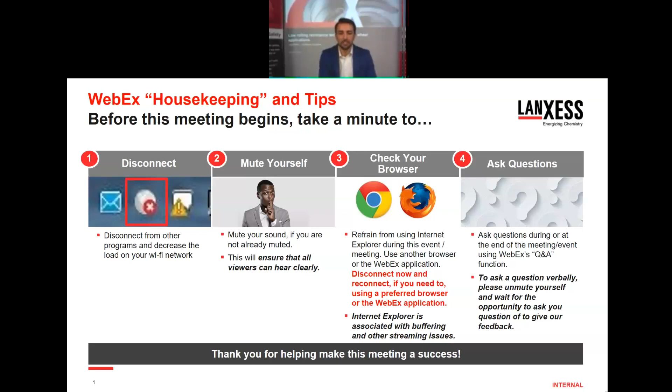I'd like to take the first 3 minutes of this presentation to give you a brief introduction on LANXESS and the Urethane Systems business unit.

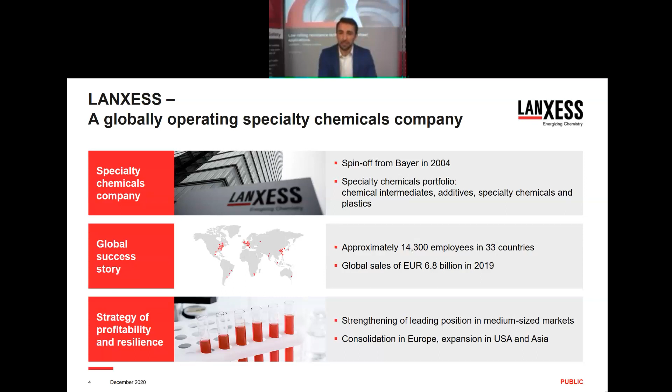LANXESS was created in 2004 as a spin-off of Bayer. LANXESS is a truly global specialty chemical company present in 33 countries with more than 14,000 employees. Our global revenue is in the range of 7 billion euro.

LANXESS has 10 different business units divided into 4 main segments. The Urethane Systems business unit is a standalone business unit situated within the engineering materials segment.

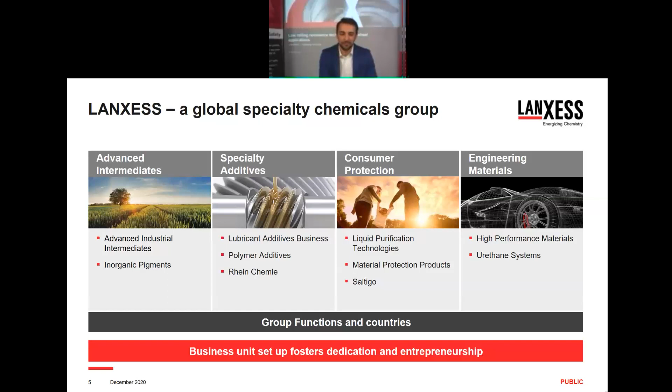I'd like to now go a little bit deeper into the LANXESS Urethane Systems business unit. We are a truly global business unit, with 6 production plants, 7 application development centers, and 1 world-class R&D center here in Connecticut, USA. We have more than 500 products in our portfolio, over 250 million euros in sales, and around 400 employees globally.

We are the market leaders for hot cast elastomers with over 60 years of experience in this technology and industry. And as you may know, we are also the market leader for low-free isocyanate technology.

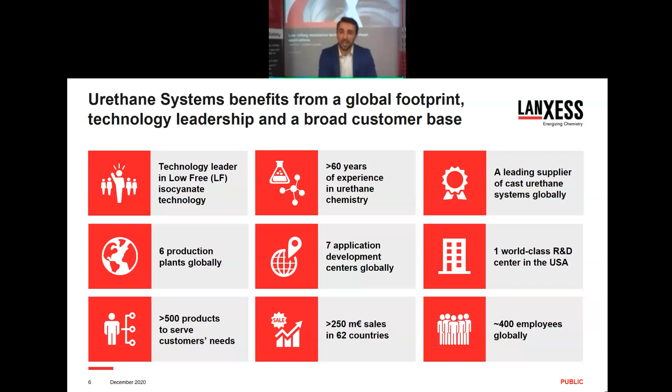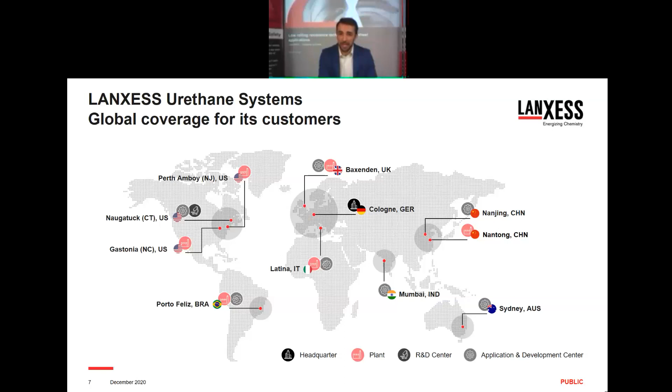This next slide shows you how truly global we are: 2 production plants and an R&D center in the USA, an application development center in Brazil. We have 2 plants in Europe with 2 application development centers in UK and Latina, and our global headquarters is in Cologne, Germany. We also have an application development center in Mumbai, India, and one in Sydney, Australia. We also have a plant and an application development center in China.

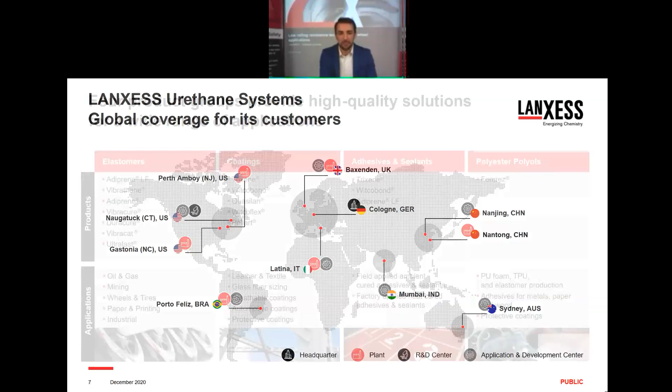Our products are divided into 4 main groups, where elastomers is the main one, and tires and wheels is one of the main applications within the elastomers group. We also have products for coatings, adhesives and sealants, and polyester polyols.

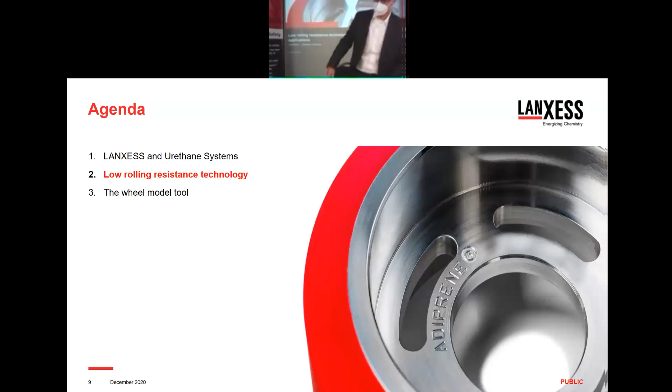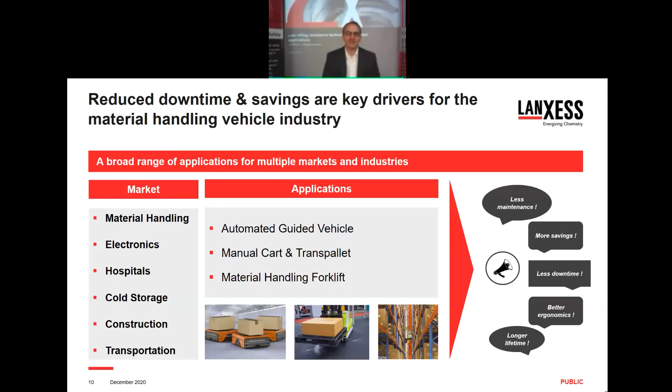Thank you for the introduction, Bruno, and we'll dive right into the low rolling resistance technology here. When it comes to tires and wheels, there are many applications, and across the applications, the big things that are important are reduced downtime, and what we're trying to do is elaborate that now to low rolling resistance or energy savings. When you talk about these industries, we talk about material handling, roller coasters, robotics, push carts in hospitals, and many different applications where that rolling resistance does become important.

So here at LANXESS, what we try to do is look at the actual end requirement and correlate that back to a material property. You can see here in the middle table, we talk about actual end use demand or needs: longer life, loads and speeds, flat spotting, energy savings. And what we try to do is correlate that back to the actual engineering property, not a data sheet property most of the time, but an actual engineering property. And how do we obtain that engineering property?

For instance, when we look at lifetime, one of the things that's of interest is fatigue resistance, and we can relate that back to different fatigue tests. There's tensile fatigue tests, and in our case, one of the ones we rely on heavily is Texus Flex. We also, in terms of lifetime, look at hydrolysis. Hydrolysis is the effect of moisture attacking the urethane and degrading it. We also look at abrasion resistance.

We want to look at the load and speed capabilities of a material. In that case, we'll look at dynamics. We'll look at flat spotting as well.

So you have two types of flat spotting, whether or not you want to look at creep or stress relaxation, or just in terms of dynamics frozen in that can be rolled out. So we look at the hysteresis curves and the modulus curves on those. Those can also be related to the dynamics, and can also be related to rolling resistance, and we'll talk a little bit about that.

And you can see there's other ones as well, there's the no noise and the non-marking. And again, we try to correlate those as best we can back to an engineering property.

In the industry today, most materials for wheels are rubber or urethanes. In this case, we're going to compare a standard rubber with one of our high-end urethanes with a focus on rolling resistance.

So when you're looking at the two categories, rubber, the main benefit we see a lot of is improved wet traction. If you need very good wet traction, rubber is usually the way to go. If you're looking for the lowest cost initial investment, the rubber is the way to go.

With urethanes, if you're looking for that lower rolling resistance, or that improved dynamics, that increased load capability, urethanes are the way to go. And generally, urethanes have improved abrasion resistance when you compare at a similar hardness.

So in this case, on the right-hand side, we're looking at the two materials, a standard 75 Shore rubber with one of our high-end newly developed 75 Shore urethanes. The red bar is the actual rolling resistance, so in this case, lower rolling resistance means less force to roll the wheel, so lower is better.

The gray bar is actual load capacity at 10 miles an hour, so in that case, higher load capacity is what we're looking for. In this case, what you can see is the urethane is roughly 3 times improvement in terms of rolling resistance, and this is per wheel for the specific application we were looking at. The load capacity is significantly higher at 10 miles an hour, again same hardness, 75 Shore, for both of these.

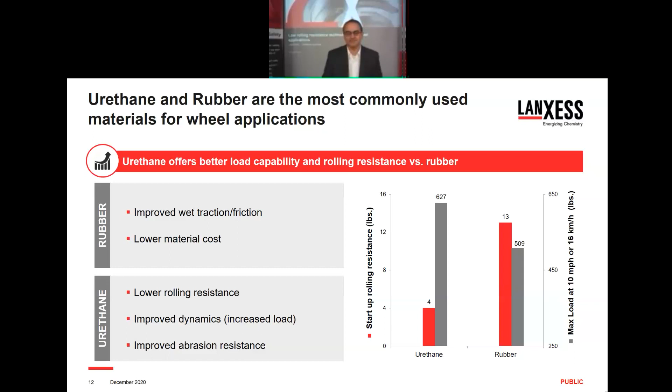I think we have one more question. Yes, we do. Ian, is lifetime of a wheel affected more by the cut and tear properties or by the fatigue properties? So another good question. The comment here, I'll go back to this chart - is the lifetime of a wheel impacted more by the fatigue resistance or the cut and tear?

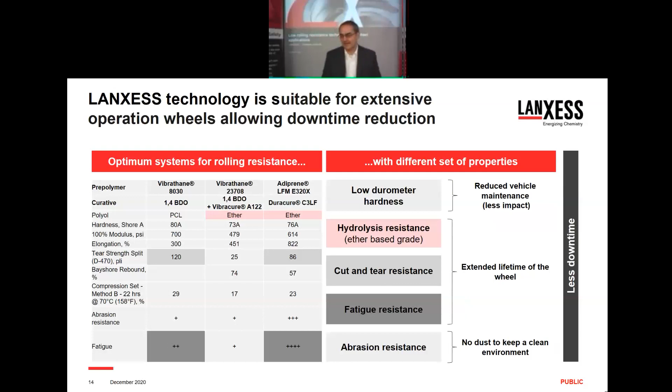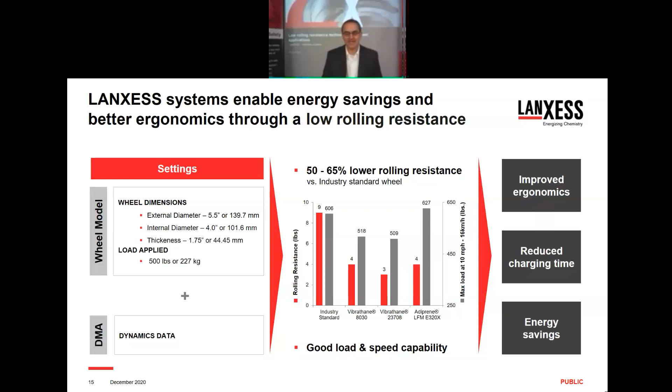So what I'd like to talk about next is our proprietary wheel model. In-house we have a wheel model developed to predict end use. Basically we look at the material properties and input them into our wheel model, and we can predict hysteresis failures in different applications. We can also look at fatigue failures and bond failures with this wheel model.

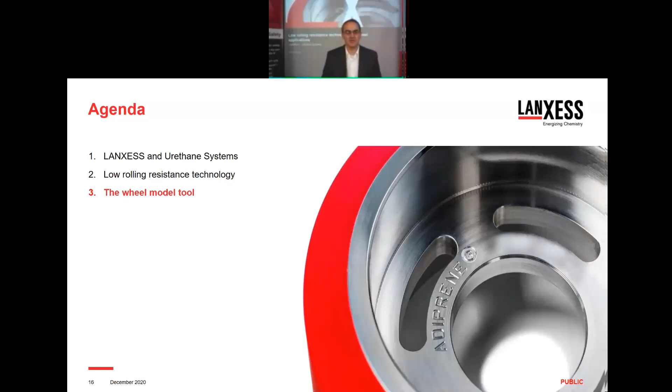The basis behind this wheel model is our dynamic mechanical analysis, or DMA. I'm not going to talk too much about it here, just give a brief overview - we have full presentations that cover this dynamic mechanical analysis. Basically, we can take a specimen about the size of an index finger and generate all the engineering data required to accurately predict failure. We look at energy stored, energy lost, and the change in modulus versus temperature as the wheel works.

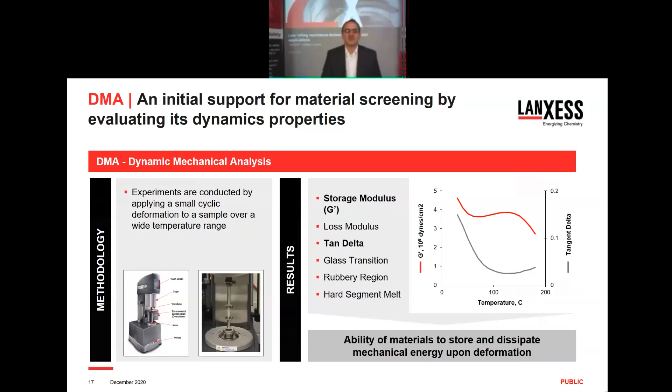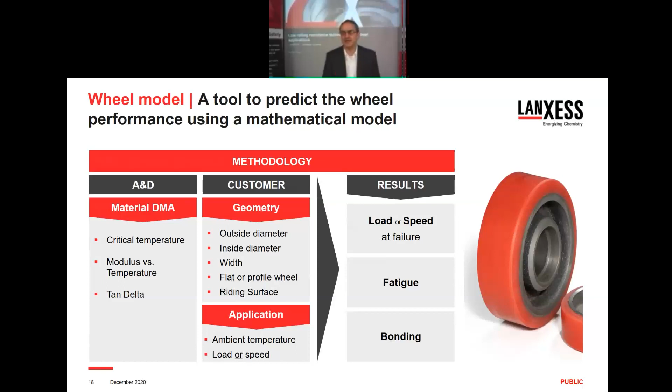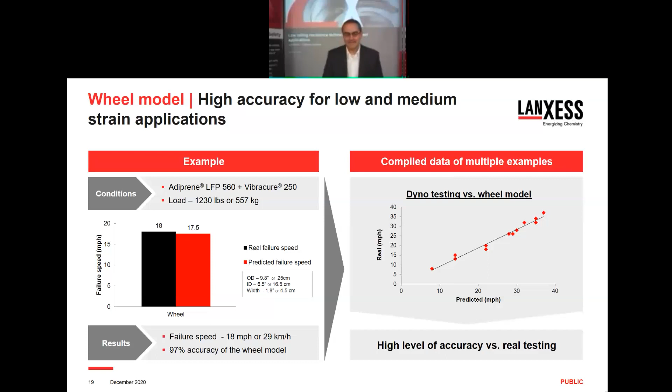With that, I'll throw a couple conclusions out here. I just want to recap that we are a systems provider with many different solutions out there, many different chemistries, and we can focus on different needs of the customer. In this particular case, we're looking at load capability and rolling resistance, that relationship between those two, and how we can possibly save some money or energy with lower rolling resistance while maintaining the loads needed for the capacity versus different materials, in this case rubber and other urethanes.

We do have a broad range of urethane technologies to achieve desirable performance. In this case, we just highlighted three at that 75 Shore mark with very good rolling resistance and load capabilities. And the last comment is our technical team combines the chemistry know-how, or chemical know-how, as well as material properties and engineering know-how. That synergy is what we like to provide to our customers for a solution, and a perfect example of that is our proprietary wheel model.